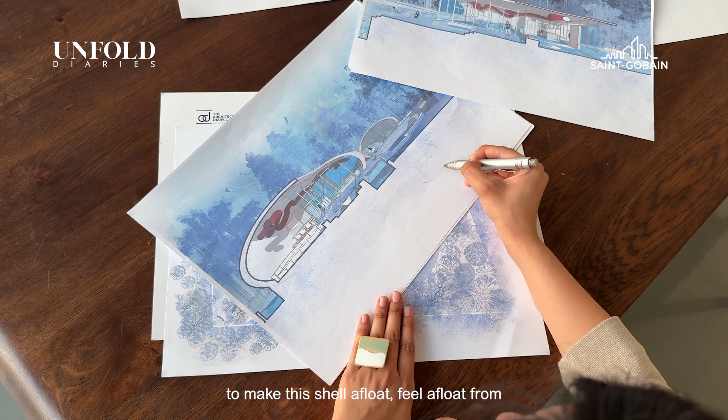One of the challenges during construction was trying to make this shell feel afloat from the ground, and not like a vault on the ground. A lot of structural engineers told us, why do you need to do that? Why not just make a vault rather than an entire shell?

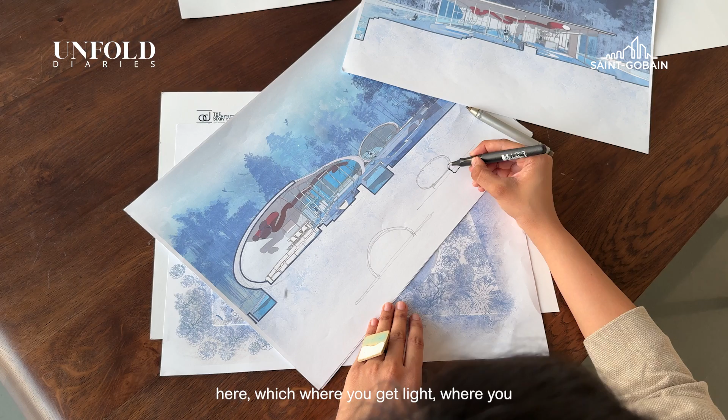The reason was to really have this offset and a water body here, where you get light, where you get a beautiful reflection of water, and then the ground starts. So the larger idea to take it afloat was to make it look floating, to have green coming till the very edge, and have the shadow of the building coming down.

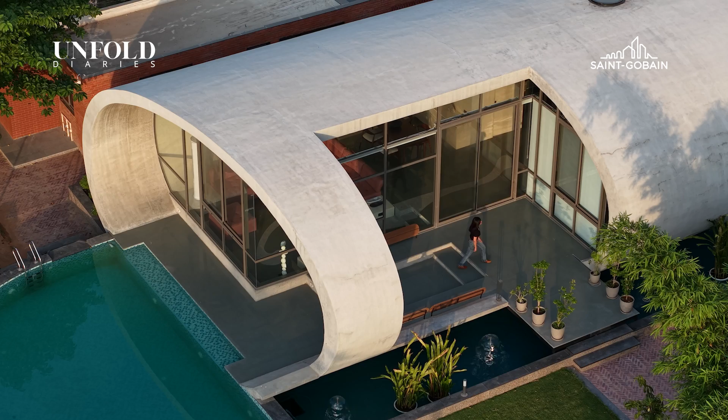We wanted to blur the boundaries between inside and outside, and didn't want any interruption in the views across the farms around here. We used a lot of laminated glass, questioning the preconception that limited glass is needed because we're in a temperate zone going through 4 seasons. We tried to take care of climate issues through the planning of the project.

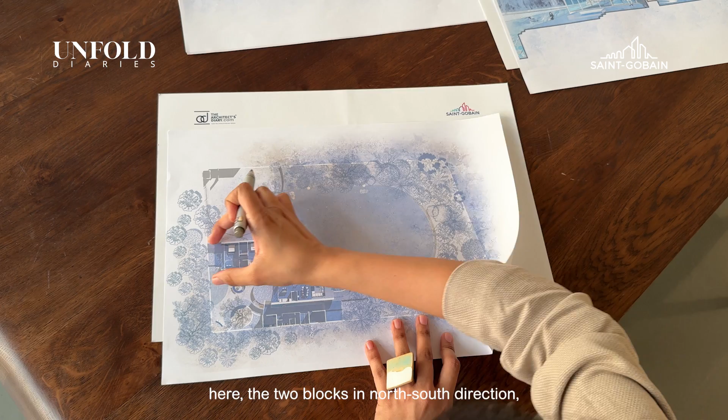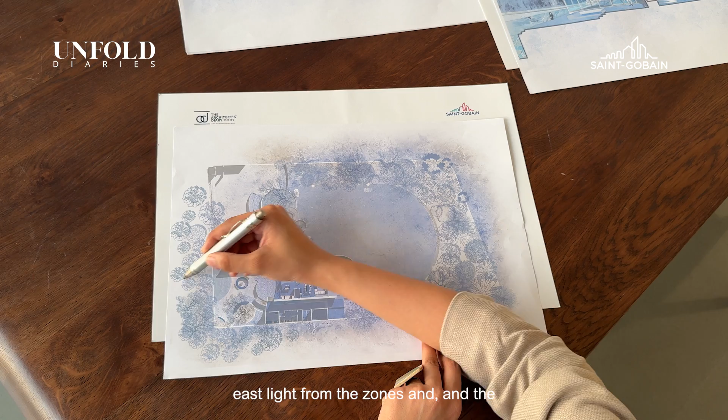We built 2 blocks largely in a north-south direction. We are opening majorly in the direction of the glass facades, which is mostly towards the northern side. We are blocking away the west completely, and welcoming the east light from these zones, along with the evening sunset and evening deep light from this side.

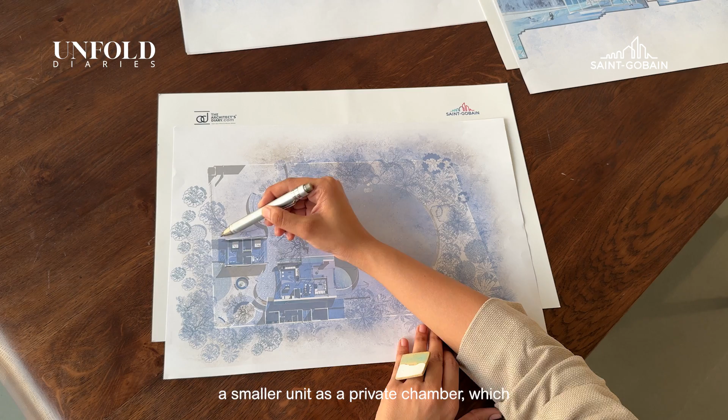So that was the larger strategy, to have a smaller unit as a private chamber which houses 2 bedrooms at its core.

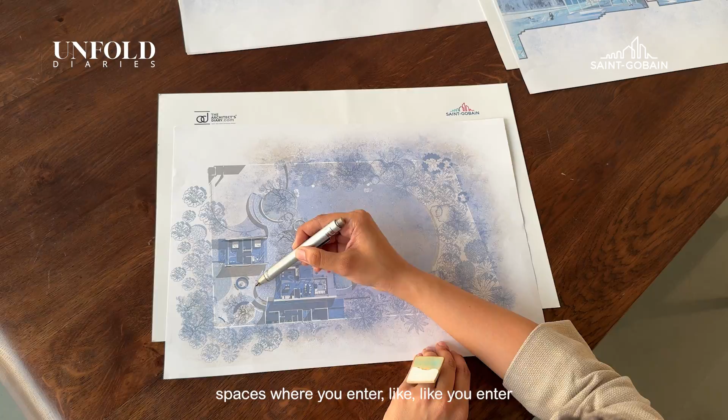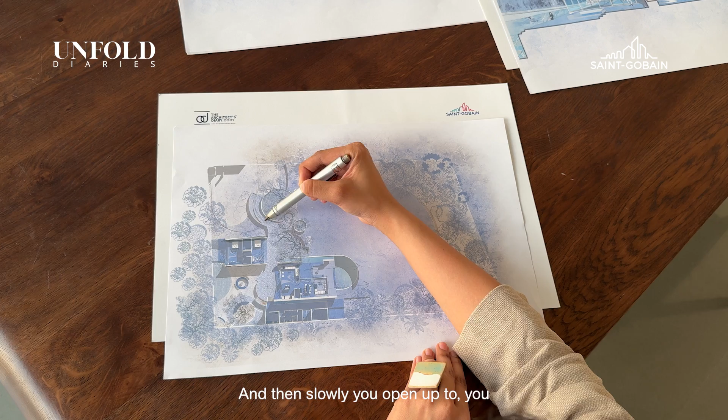And then have this major public or semi-private space where you enter almost like entering a forest, with winding streets and really dense forestation around. Going through this low foliage between the trees, you slowly open up to a semi-open space, then see a bunch of trees again.

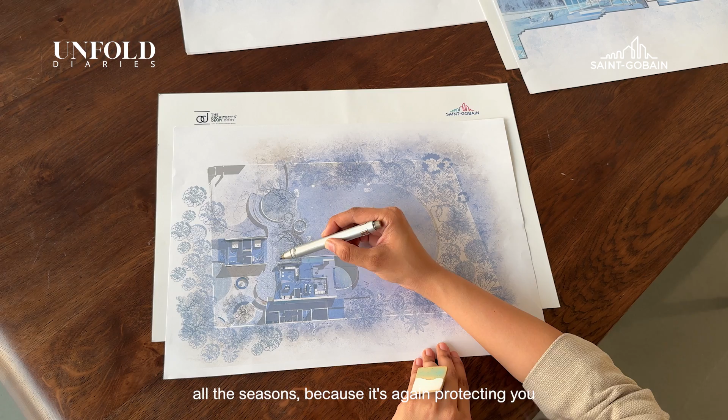Then you have this plaza, and incline towards the entry point where there's one living space with an open kitchen, which becomes a place to enjoy almost all the seasons, because it's again protecting you from direct sun but also has a lot of play of light due to its east exposure.

As you move ahead, you have a really open plan which spills into a dining space and a veranda space, overlooking the water body.

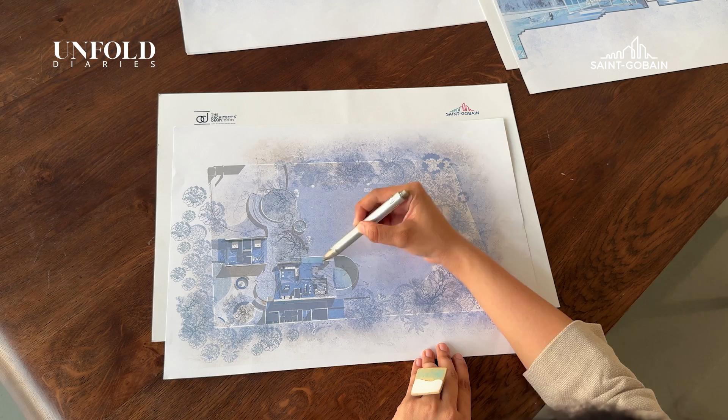And having this sunken living space, which gets exposure of the sun, was very intentional. This zone is largely our night and evening space, and this zone entirely is our day spaces. Even if someone wants a nap in the day, this becomes a shaded, cozy dome.

In this project, we wanted to use very little materials, very monolithic, very singular materials. Largely the structure is reinforced concrete, and the finishes contain largely lime. The major chunk, the facades, is made up of Saint-Gobain glass.

Glass is generally misunderstood as just giving exposure and transparency. Of course it gives that, but it also gives a lot of strength. All the facades are glass panels, laminated glass, which are highly durable to external forces, and also help in cutting down some of the outdoor sound, as the site is right next to a highway.

In the interiors, we have used lime to give largely a monolithic experience throughout the spaces, and have built-in furniture as you see around. We have used polished kota inlaid with terrazzo to add dynamism, and back-painted glasses in a lot of furniture, especially for kitchen panels, kitchen shutters, and cupboards housed within the washrooms. That's largely the very neutral color palette you can see here.